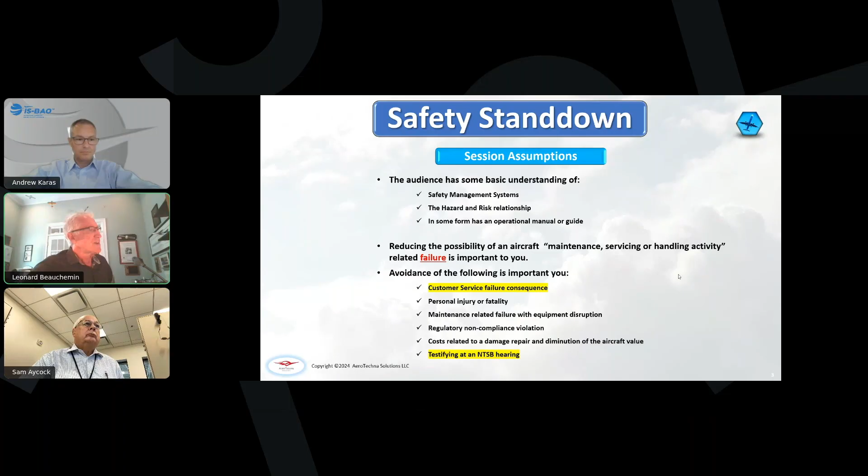So my assumptions are, as I just mentioned, safety management systems - I don't need to walk through that. I do believe that everybody here is interested in reducing the possibility of aircraft maintenance, servicing, or handling activity-related failure. It's not just maintenance - I'm going to show you examples of servicing and ground handling where I experienced an AOG in an unusual location.

And then avoidance of the following is important to you: of course, customer service failure consequences. It's not just that you're going to have a mechanical disruption on the airplane or a bad event from an aircraft operation standpoint. So I'll go through these slides, and I'm not going to read each one - I should have mentioned that already. We'll talk about them at the end. If you have questions, we can do that.

So my session goals: understanding and managing failures, with the thought process being first and the behavior second. As PS3 operators, I believe you're not really spending a lot of time just trying to collect a lot of hazards and risk - it's really not about the thought process. So think about what the consequences of failure could actually be, what could actually go wrong, and then enact the behavior.

We're a little bit different in the beginning if you're stage 1. Well, agreement for the goal of avoiding failure is not analytics of process. It's not reports and measuring and policies. It's continuous human behavior - that's really what we're going to look for, especially as we move forward, because we have some behaviors that creep into our operation, especially as we become very mature with SMS. I've been with SMS since its early days, in the very early 2000s, I think about 2001.

So also, to gain probably some consensus: accept the goal and realistic management of risk to an acceptable level, and that we will have losses. Your aircraft are designed and delivered with the expectation of the probability of loss. Now that probability is very, very low - for a top event, it's 1 times 10 to the minus 9, so 1 in a billion, when they're doing the engineering analysis and development. But yeah, that type of loss is possible.

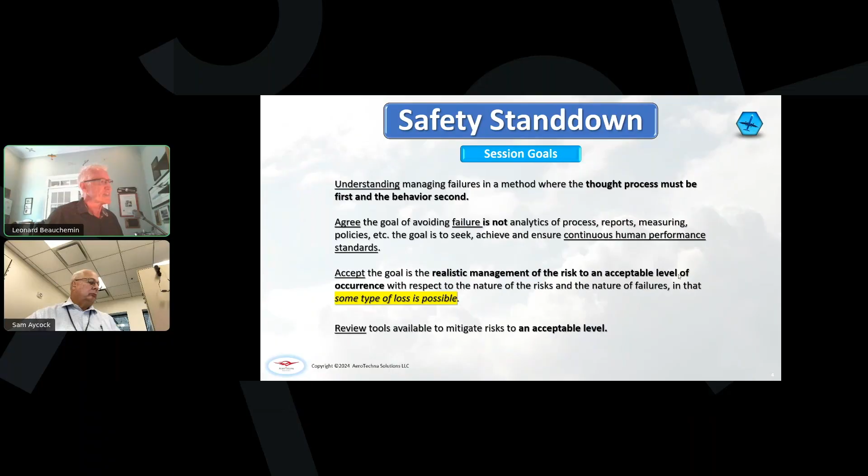It's, we really can't eliminate everything, so we'll work on that. And then hopefully I can give you some tools to consider. One of them will be that post-maintenance SMS - that is a tool to be used that I hope will check off all the possible, we'll say, quality escapes, at least from the disciplinary area of activity that took place on your airplane.

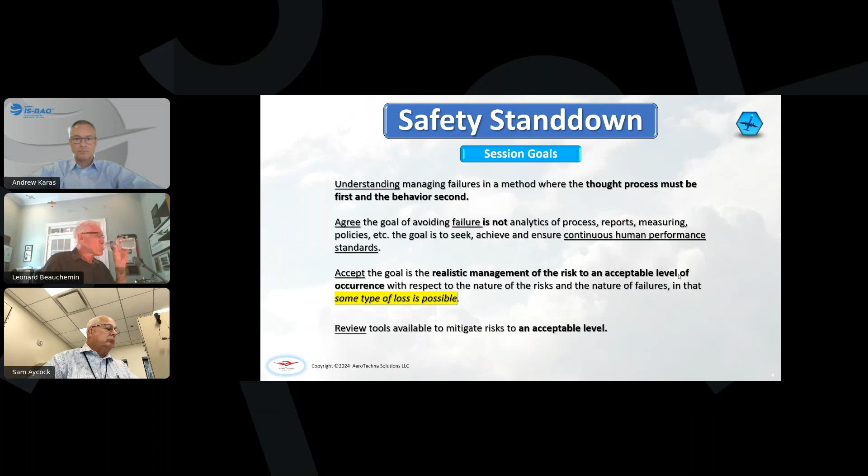Okay, some safety myths. I like to talk about safety myths first because we're in a very different place with PS3. Some of them, really quickly: safety is our business. I don't believe anybody on this call is really where safety is your business. When I say that, it relates to, are you manufacturing, selling, working in environmental health and safety environment? I don't believe that to be a flight operations responsibility. That's a bit of a myth, and we hear those words.

The next one is: safety is ensured by training and equipment. We need to always consider, no, that's not specifically going to be the case either. Some people say, hey, I got you the right gear, I got you the right training, we shouldn't have any events, right? Well, that's not going to happen.

And then one of my favorite ones: I have a contract with the FAA, an agreement with Transport Canada to teach maintenance program development and management. And of course, when you talk to regulators, a lot of them believe it is safety at any cost. We know it's not safety at any cost. If we just look at the air carrier industry, if that were the case, I'd suspect they'd have a big panel or software in the galley area that tells you when your seatbelt is buckled or not, so they wouldn't have to worry about walking up and down the aisle. So we have that in our automobiles, but not in aircraft. But is it worthy? So it's not safety at any cost.

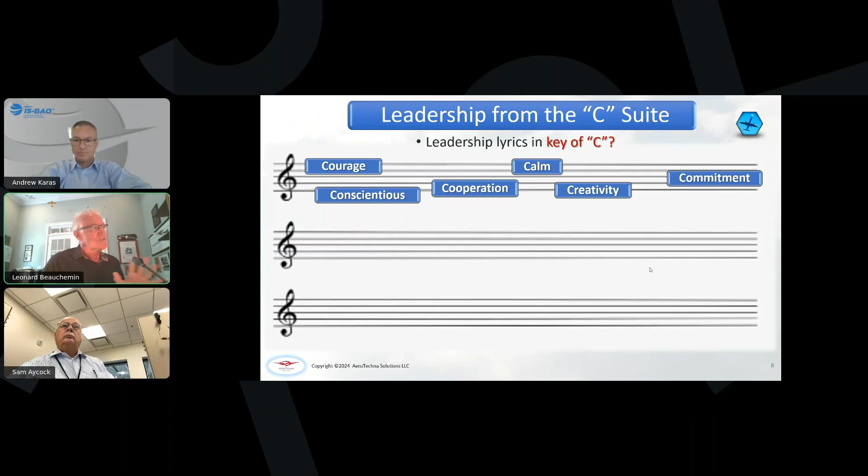And then in the next bar, we got, of course, some additional words, so I'll go through that. Some of these are very important - two are going to be very critical to what I'm going to talk about in just a few more minutes. Clarity, communications, collaboration, confidence - all these are important, right?

Character, compassion - I'm an aviation idiot, my mom always told me that. So yeah, compassion, I'm very compassionate about what we do, and compliance. We stand on that. That is the pillar to take us to what we like to think of ourselves as being a safe operation, right?

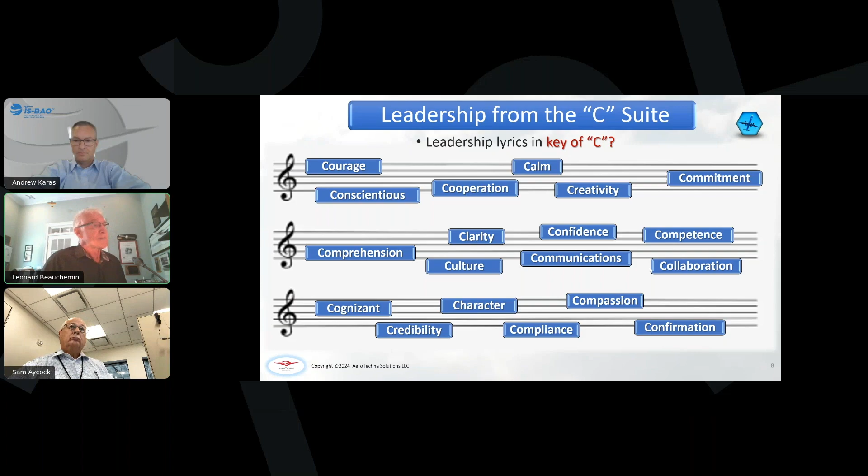That confirmation. But there's some also interesting C words that can really disrupt this. Now, when I do this in a group, I kind of incentivize everybody to throw out some ideas. But here's some words that don't really help us out when we're trying to send the right message and build a culture. So all these C words, these are words that can create some chaos for us, and that's one of the words there that really don't get us what we expect out of it.

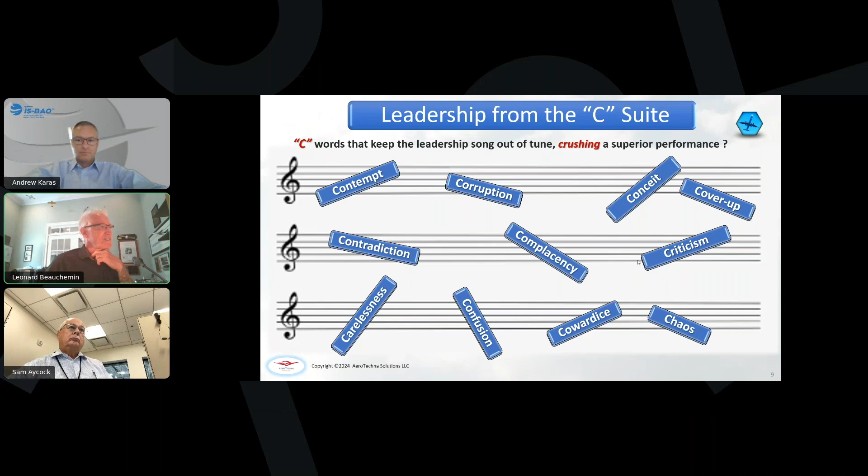So it's a good idea, I think, sometimes to think about the message that we send and the words that we use that don't help us out. So when we go through this process, over time we identify that we have a risk appetite, and that's really what a lot of this comes down to. It's both personal risk and your cultural risk in your organization. A lot of times I can go through a little group exercise to help us through that.

But I'd like you all to take the time to understand you have a personal risk appetite. So I'm a mountain biker, a single track rider, wakeboarder, a skydiver. Okay, pilot, that's not high risk, right? But my behaviors, some people say, well, that's a risk appetite, Len. That maybe is unlike somebody who rides a motorcycle or somebody who refuses to ride a motorcycle because of the amount of risk, or free climbing.

So a couple of things that I like to talk about. One is if we go back as far as Wilbur Wright, a really good quote that I was able to locate: carelessness and overconfidence are usually more dangerous than deliberately accepted risk. That's true. All the activities I take place in and partake in are things I've trained for. I've watched - of course today we can watch videos - and I've practiced to get all the risk out that I can. So I think my personal injury is going to be pretty minimized.

There's another one that I've used in my time with leadership responsibilities. I've been VP, I've trained in a leadership role to help assist others develop leadership skills. This is a good one: just because it's not wrong does not make it right. It's a very interesting conversation when you enter that. And that's a bit about, if you're going to be blunt, it's time to call that out.

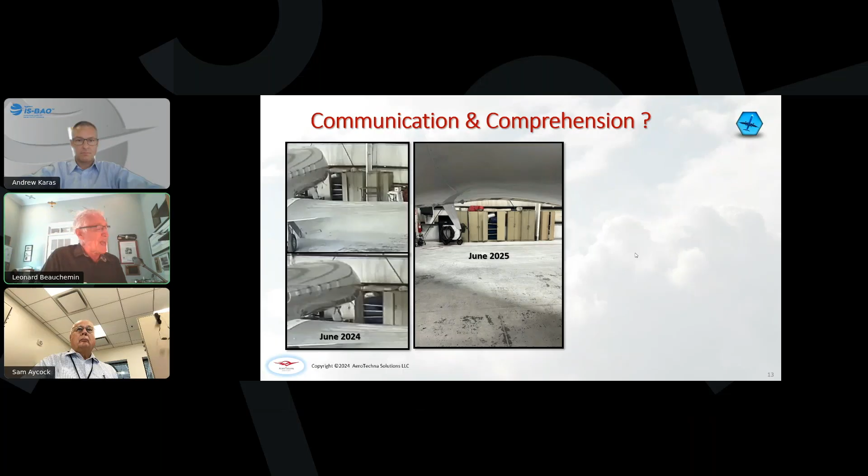What was interesting is that you think you communicate and get comprehension, and this can never happen again. Back in June 2025, my captain was in there and took a picture and said, 'Hey, Len, check this out.' So he sent me that picture. There's a disconnect there from what I would have expected. Maybe the communication and comprehension weren't aligned, but that cabinet door was left open, which is what happened when a breeze came into the hangar and damaged my airplane.

And most recently, I went through a very thorough debrief on my 144-month inspection about the quality of the aircraft, and we really can't have any damage to the aircraft. Please do not deliver me an aircraft with damage. So you're going to see those pictures on the right. I have some scratches on my entry floor, some scratches on my leading edge, and some scratches on my antenna penetration areas.

You might think, well, you found those during maintenance. No, my airplane was returned to service. We were out with the flight crew preparing to depart, doing a walk around, and that's when we found these. I asked, 'Are we all done?' They said, 'Yeah, we're done.' Well, I don't know that you're really done, because I have these quality escapes, and that's what they are. On the leading edge, they can be significant depending on the depth. And on the floor, my principal is a very specific type of individual—he's very precise about cleanliness, neatness, and no damage to his aircraft.

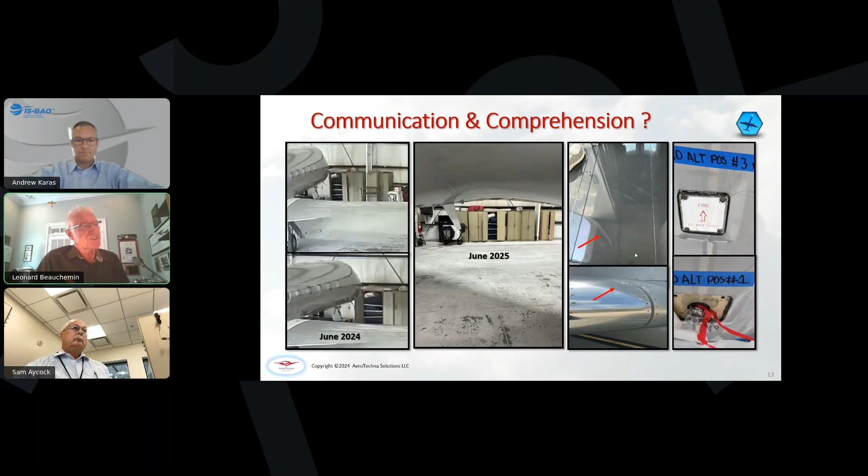So we're sharing information. If your scheduler or dispatcher looks out the window and sees something that's not quite right with the tug operations or another approaching aircraft, we would certainly expect that we can approach that and communicate. At the same time, we should have comprehension of what we're trying to communicate. So say, 'Hey, make sure you address this.' In a very basic way—address what? And of course, you can always say, 'Repeat back to me, do you actually understand?' That's very common on the flight deck. I'm a pilot, so read back is important.

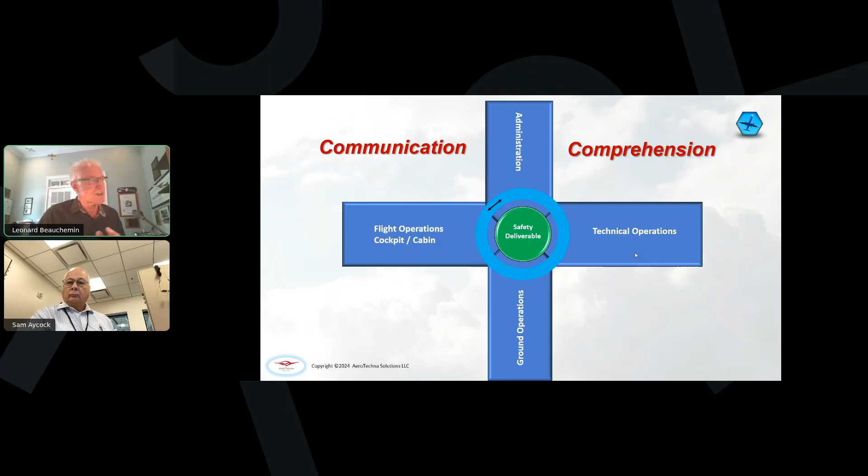But in the center, if you come to agreement that safety is actually a deliverable, it's part of our agreement and commitment to our passengers that we've done all that risk and hazard mitigation. We've taken all the steps necessary. I don't ever talk to passengers in terms of hazard and risk—I always talk in terms of safety. But internally, I think most of you talk in terms of hazard and risk, and that's really what we're after.

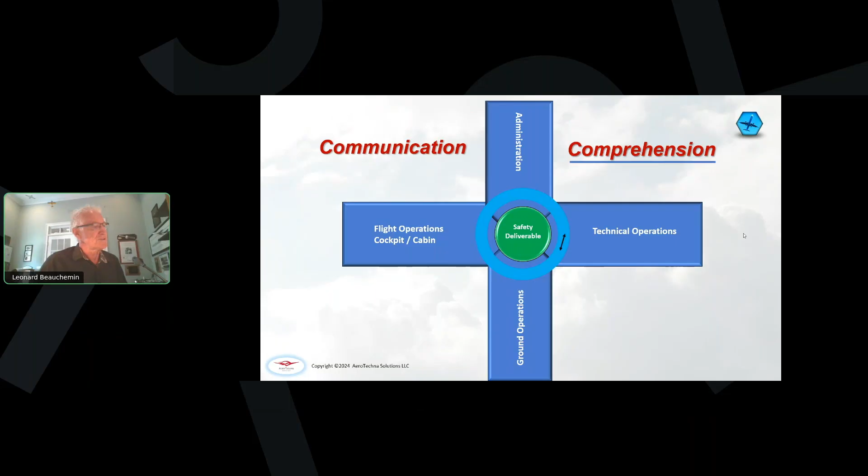So kind of a visual—adult learning is very visual. I like to give this approach where comprehension, to me, is becoming an issue. Maybe it's the four generations and the ability to Google and text, but you have to validate that. So when we look at safety as a deliverable, there are seven attributes we're all working on. I'll populate this chart and give you an idea.

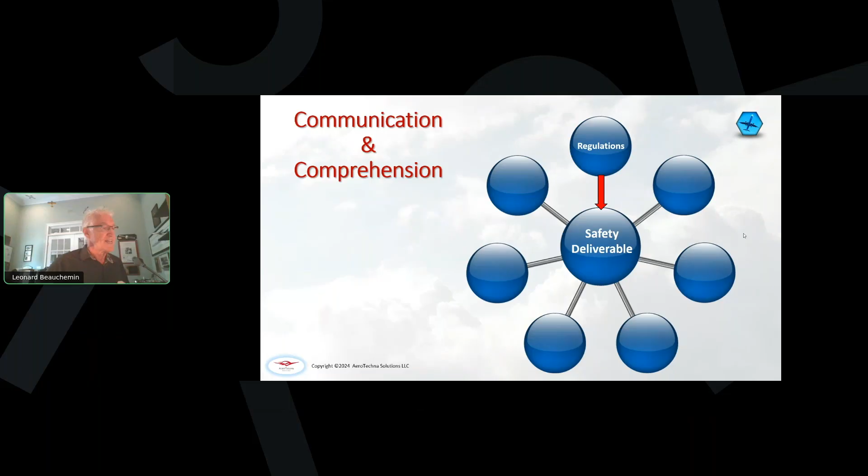Our very first box is regulatory, right? We have to comply with the regulations—that's pretty black and white. All those regulations are really driven to ensure a level of risk that is acceptable at the regulatory level. It doesn't mean ours couldn't be tighter, but at the regulatory level, that means they're accepting a level of risk for the industry at large.

We have regulations, and then we take those regulations and embed them into an operations document. That operations document has a couple of purposes, but one of those is to ensure that hazard and risk have been mitigated to a precise level. So safety is a deliverable there. We have a just culture policy—I'm suspecting all of you on the call today are familiar with just culture.

The essence is that when you have a performance issue, a quality issue, not intentional negligence but an error made, the consequence should be that there's no punitive effect from voicing that. It's an open door. I have the ability to say, hey, I made a mistake, and not get a punitive response from that. So that's just culture, real brief.

Training, training's all about our safety deliverable. We have to have the proper training. We get that. Equipment, I've mentioned that already. And yes, we certainly have reporting, assessment, recording.

There's no way to know how we're doing and to measure ourselves, to say if we have a tendency to have one particular activity that's creating more issues. We wouldn't know that unless we went through some reporting assessment. And then we like to use industry standards, and that's what IS-BAO is.

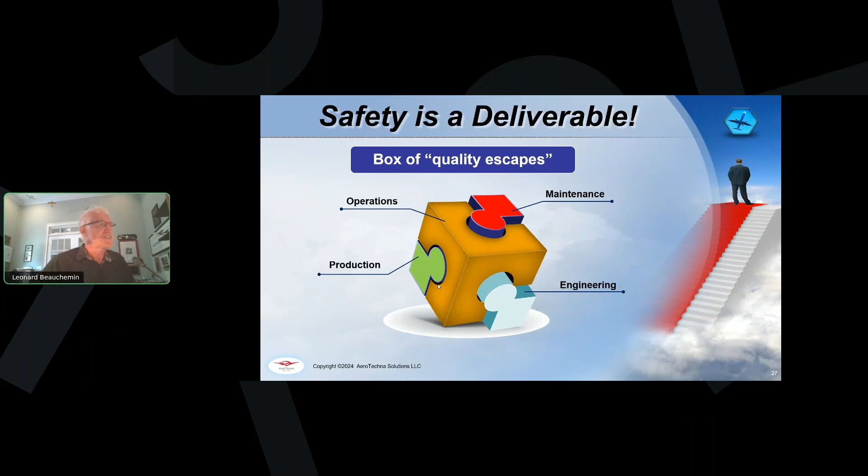Of course, they come from maintenance. I just already showed you a few of those, and engineering.

So here we are. An assembly of defects, errors, and mistakes ready for flight, right? We hope not. Airworthy and ready for the mission, mission ready. Those are two different concepts. Mission ready means my passenger services, the connectivity, whatever catering, whatever equipment he wants on board. Yeah, it's mission ready.

So when it comes to identifying the fact you have a quality escape, what can you prevent, why you can prevent it, and how? How do we do this? And I want you to strive to elevate your perspectives, expectations, and choices related to aircraft technical preparedness. See what that means.

It's a bit incredible. I went to Chattahoochee Technical School here in Atlanta. One of the conversations was developing a program for tool identification. So that means the technicians entering the industry don't know the difference between a cross point, flathead, universal socket, straight, ratchet, inexperience, right?

Diminished computer skills, they really rely on their ability to find things through Google. And of course, now we're using AI. So pick one of those fun AI software, Copilot or whatever. And of course, alternative communication skills.

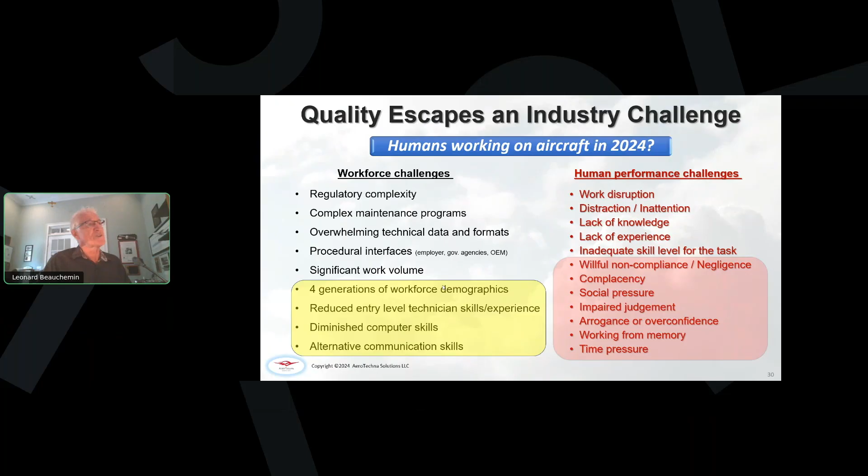One is willful noncompliance. This is when somebody elects not to follow the checklist provided in the AFM. Somebody chooses not to follow the maintenance instruction provided in the AMM. And I think AFM is for the flight manual, the aircraft maintenance manual.

Complacency, social pressure means it's a bit of a tribal rule. We're all doing this, we all move the aircraft, gross example, and we're only using 1 or 2 people and we never have an event. So why would I ever ask for 3? If I ask for 3, I'll be judged on, there must be something wrong with me. Everybody can move it with 2.

Impaired judgment, that's an issue. Arrogance, overconfidence, working from memory and time pressure.

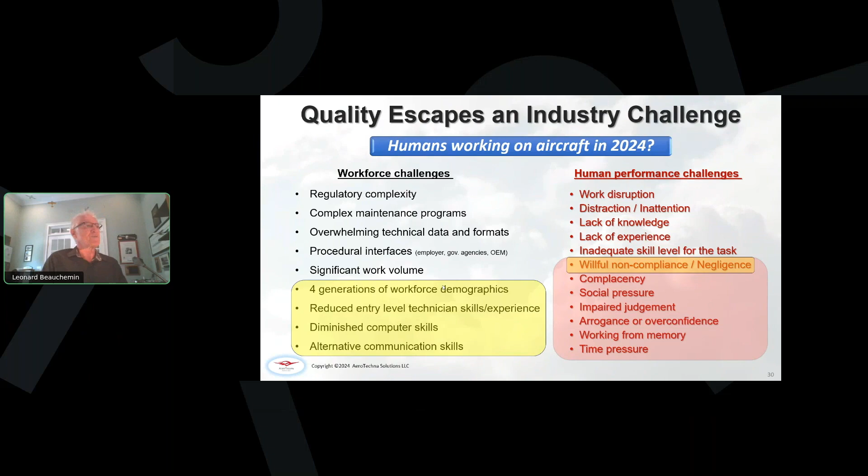So, some quick ones on that. A few other quick quotes. I like this one: what we hope ever to do with ease, we must first learn to do with diligence. And this is, I think, my most favorite quote I've ever read: we make our world significant by the courage of our questions and the depth of our answers.

This presentation, if you have good questions, don't be afraid to ask. And my point in the beginning is don't be afraid to be blunt and ask a question, whether it's of your coworker or a supplier.

All right, so quality escapes come in three buckets. I like to put them in. They come from manufacturing, I put those in the bucket called defects. They come from deviations, these are errors. That means I didn't follow the particular instruction.

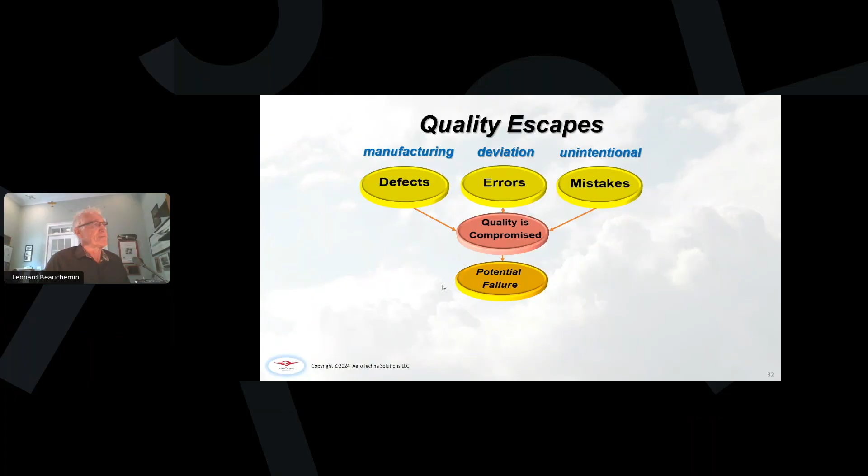I didn't do something correctly, whether I chose to willfully do it or not. These are errors that we make, and they're deviations, usually from a procedure. And then mistakes, unintentional - maybe the wrong screw was selected, maybe the wrong screw was put in the parts bin and you got the wrong one and it didn't work out. There are things that are just simply mistakes. We all make mistakes, we all commit errors, and we have aircraft with defects. But in either case, quality is compromised. It's a quality escape, and we have the potential for failure. This is our circle of opportunity.

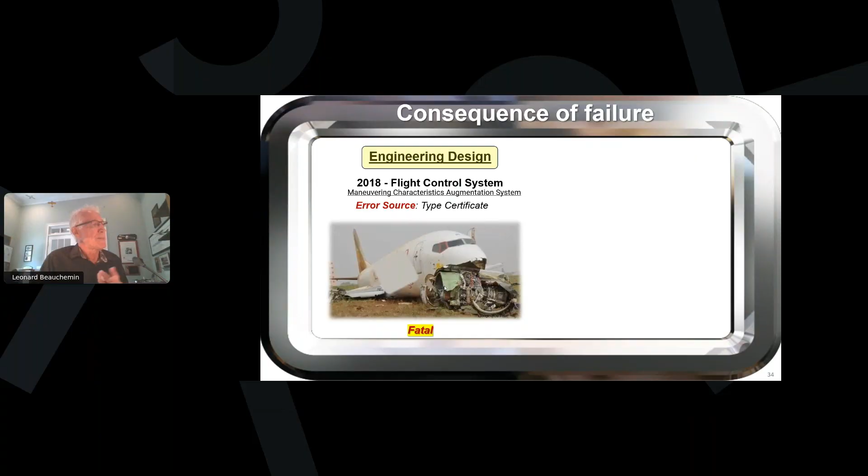Okay, so let's look at some situations real quick. Here's one I like to reflect upon - you might all recall this. This has to do with MCAS, Maneuvering Characteristics Augmentation System. That was engineered - there's a lot of questions and a lot of opinions. It really comes from the type certificate and type design of the aircraft. The finger pointing said that was an engineering deficiency, though that would be a quality escape, right? From engineering, little we could ever do with that. We buy the aircraft, we operate it in accordance with the AFM and the AMM and all the other document sets, and we expect a good outcome.

I think we're all familiar with this one. This is a production quality escape. There's not anything we can do from an operator perspective, so there's no control that we have on either of these, right? Fortunately it was non-fatal. We're familiar - it was a break in the production sequence that resulted in some missing fasteners that allowed the door to depart the aircraft. This stuff's all in the media.

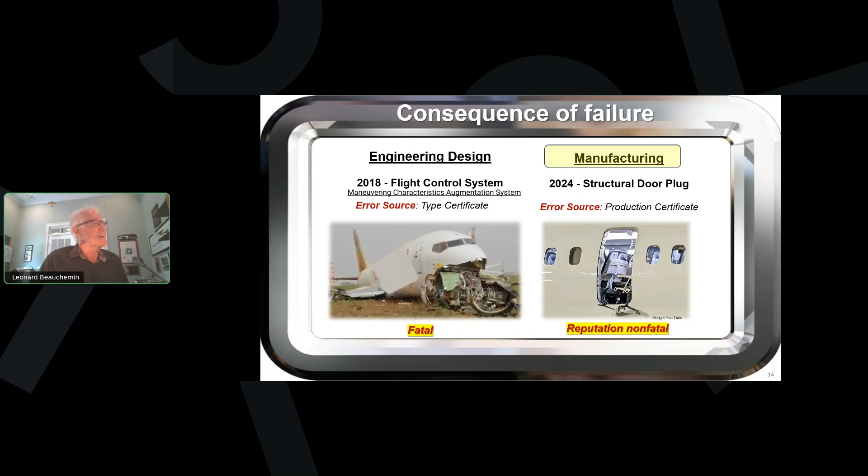Some of you may not recall this one. This has to do with fasteners missing. This is an Embraer aircraft. For those that have been around a while, this is a maintenance activity, so it comes from ensuring the aircraft maintenance is compliant, thus the airworthiness certificate. There are three certificates - I don't do a deep dive on that, but we have a type certificate, a production certificate, and an airworthiness certificate, of which the only one we can control in our operating world is the airworthiness certificate. We don't have any authority to manipulate, change, or mismanage those certificates. But in any case, what happened here says there's no evidence from the morning pre-flight that the flight crew was aware of any of the work performed on the horizontal stabilizer, right? And that's going to be part of my review of this post-maintenance SMS debrief.

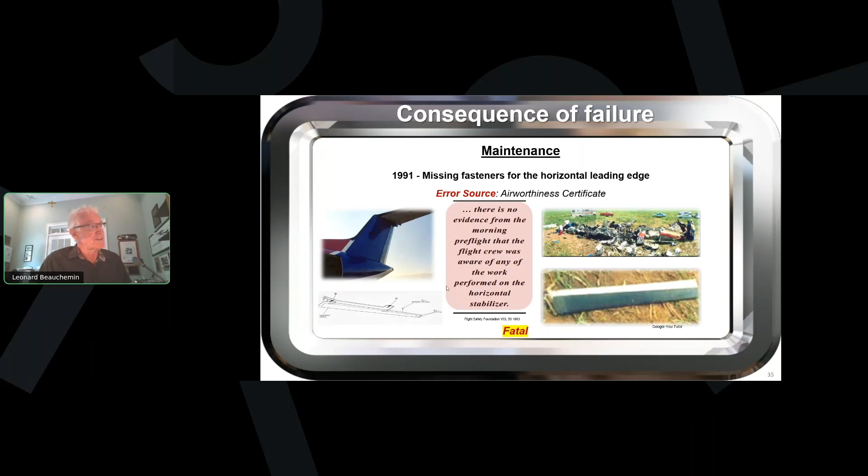This is the most fatal.

Am I okay? That was a little weird. You can still hear me, Andrew? Yep, you're still good, Len. Yeah, I don't know what that was.

All right, so I believe even now this has the highest loss of souls in our industry. If anybody remembers JAL Flight 123, 520 souls basically. But what's very curious about this quality escape is that it took place in 1978 after a tail strike on the aircraft and then a subsequent repair. The repair wasn't done correctly, and in 1985 it was complete and total loss of the aircraft. Very, very significant, horrific. There's a monument built, if you go visit, if you're in Japan - a very sad kind of memento place.

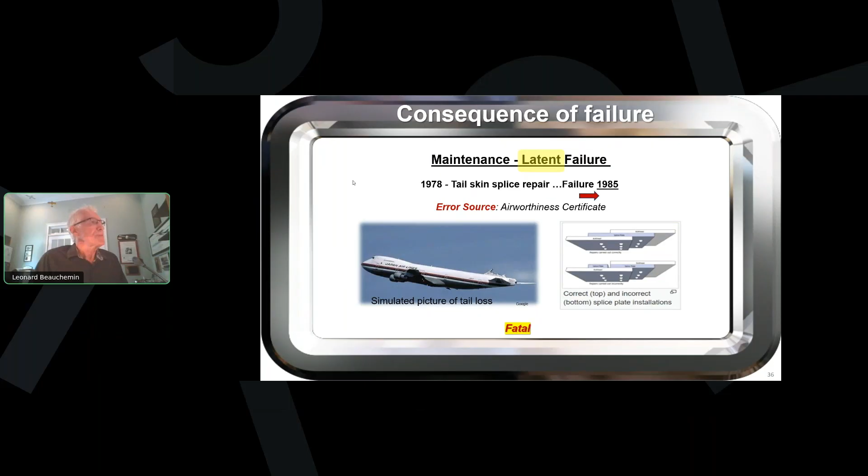And then I think most of us in aviation are familiar with this. This is failure transfer - you can do a lot of research and background, but the essence is there was a repair strap put on a DC-10. It wasn't compliant, they actually could not find all the records. Definitely a quality escape, not the right material. It departed the aircraft onto the runway. The Concorde had the subsequent takeoff, hit the tire, the tire ran over the titanium strap, failed the tire, failed the fuel cell, fire, failed the aircraft. There's also some records about a missing spacer shim in the landing gear, however most believe that wasn't the cause of the accident - it's really the rupture of the tire and then the fuel and the fire.

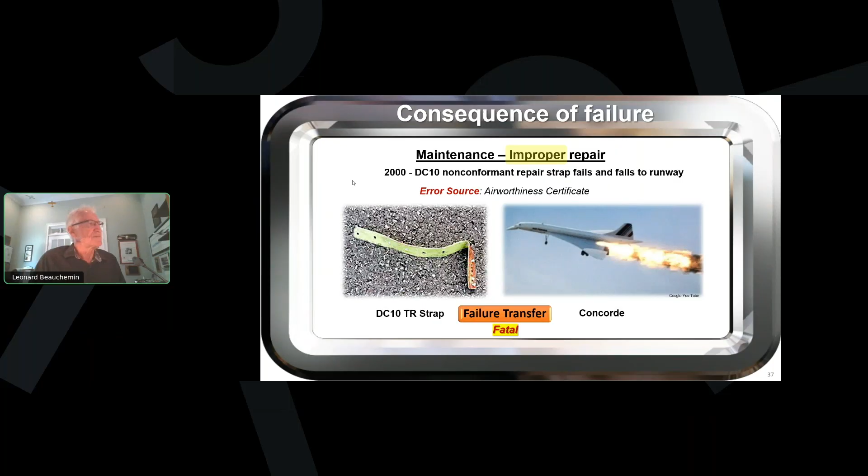So you think, oh, those are significant - this one is one that we can manage at our level, the other one's very difficult. Some might be familiar with this one - it talks about a new aircraft delivery. It's a brand new Cessna 510 being delivered. It's going to be a foreign registered aircraft, so the registration numbers are painted on the lower part of the wing.

While the aircraft was operating in the U.S., the registration transfer hadn't taken place, so the registration numbers hadn't changed. Someone said we need to cover up the registration numbers, which is exactly what the paint representatives did. They went out and covered the registration numbers on the bottom of the wing. However, they also covered the fuel cell vent opening.

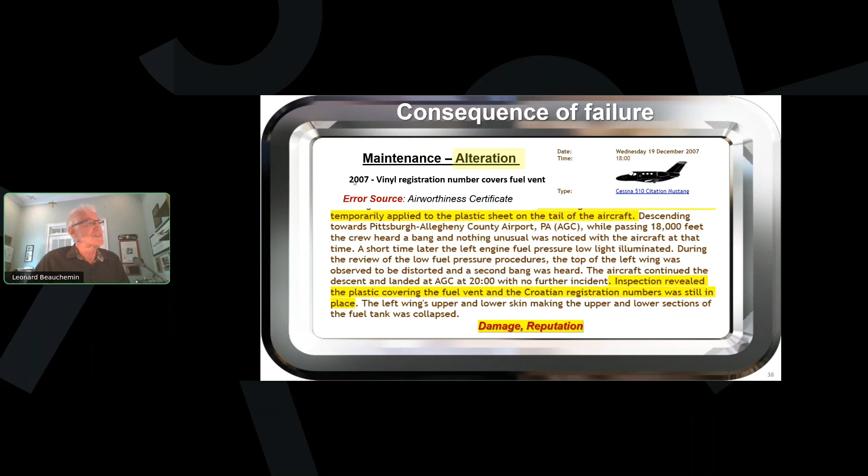So these quality escapes come in many ways. Some people would look at this incident, which was in the media a few years back, and say, oh, that's a maintenance misadventure. It's not a maintenance misadventure. That was manufacturing. The panel wasn't properly installed coming from the production certificate. Fortunately, that wasn't catastrophic. So let's bring it down to the real world, which is our world today.

Some of these we hope never to experience, but these are actual experiences I've had within the last 5 years. This is my G550 wing, and you'll notice the spoiler board has lifted up and is lifting off the wing access panel for inspection on the trailing edge of the wing. We've been flying this airplane for many years. We depart maintenance, it takes a few trips, and my crew on the walk around identifies that the panel is damaged and becoming cracked in that location.

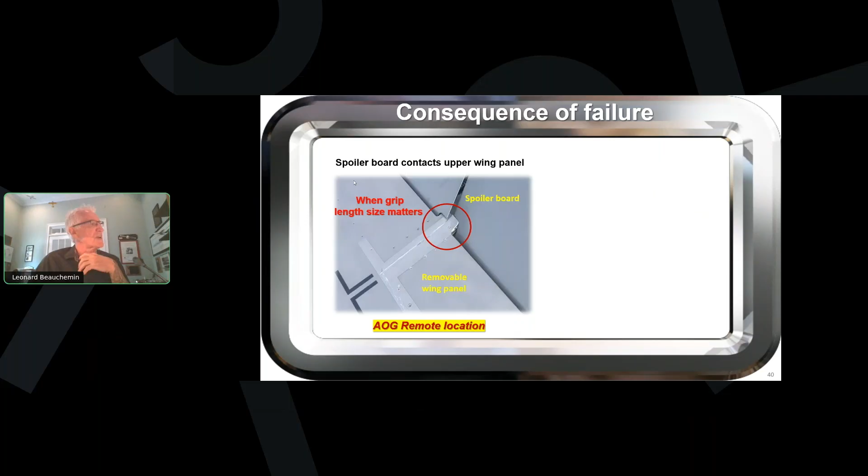So of course we're AOG, we have to deal with the situation, and I get the note: grip size matters. The MRO did not use the proper grip length in that removable wing access panel. What should have been a shorter -4 length, they installed the -5, a longer length, which didn't allow for proper tension on the upper panel and let it drift up with air pressure until the spoiler board caught it and started lifting it up. The cost of repair was significant, but what was really difficult was the location we were in when my flight crew identified it.

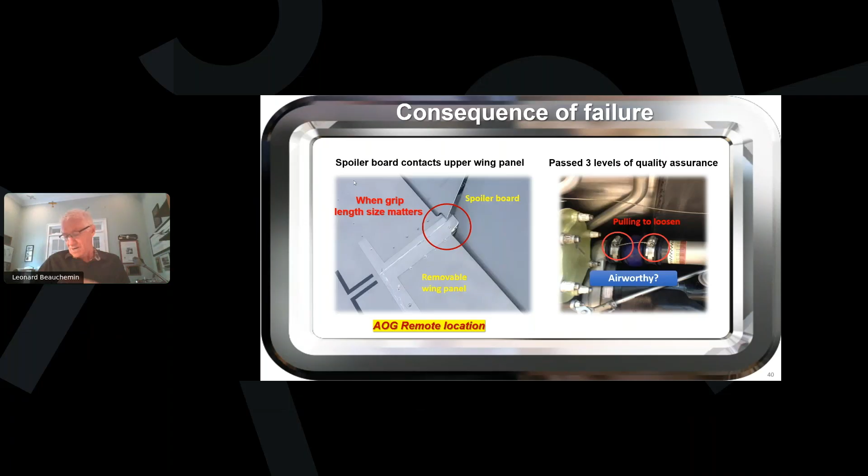Here's one I found on a walk around during an aircraft delivery. The aircraft engines had been recently overhauled - a major shop visit - probably with at least 3 levels of quality assurance. But on my walk around, I identified one of the band clamps as being improperly safetied. That makes it unairworthy. Could it fly like that for 10,000, 20,000, 30,000 hours? I have no idea, but it's unairworthy. The risk is unacceptable - if the clamp becomes loose and the air pressure going through that duct causes the coupling to depart, that could be a really bad day.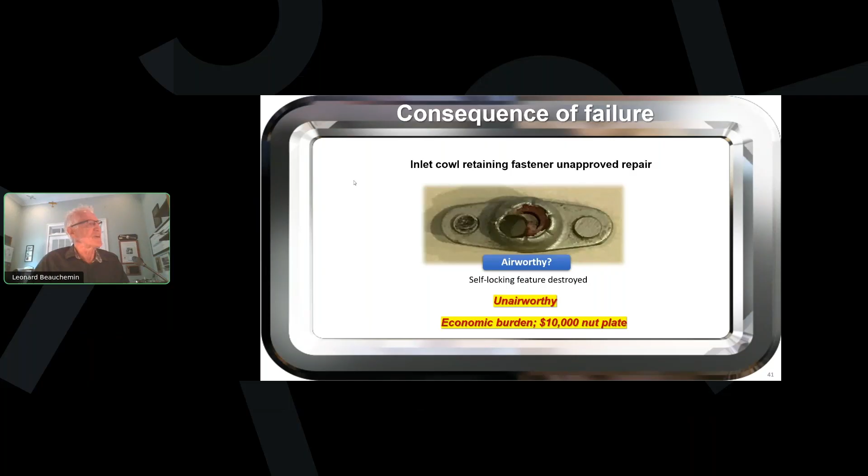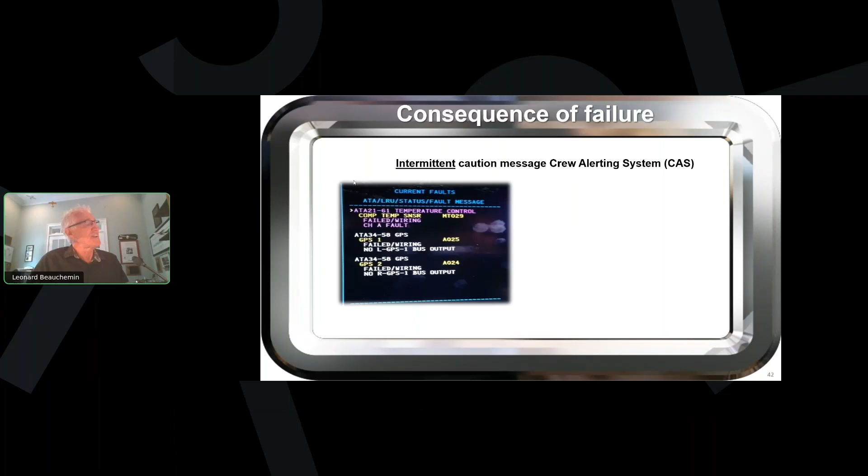This happened on a 7X that I operated for quite a few years. I had a compressor temp sensor giving an amber cautionary message. My crew would get that message, and we did a tremendous amount of troubleshooting - wringing wires out, swapping parts, putting new parts in. None of that solved the problem. We took the aircraft back to the manufacturer and said we can't acceptably fly this aircraft any longer since it's intermittent. They did the inspection, and here we have the cause of the failure - interestingly, it's called a high intensity radiated field failure. It wasn't a physical connection issue on the wires, but the shielding had broken down enough that, with the right combination of power transitions through the wire harness, it caused the CAS message to display.

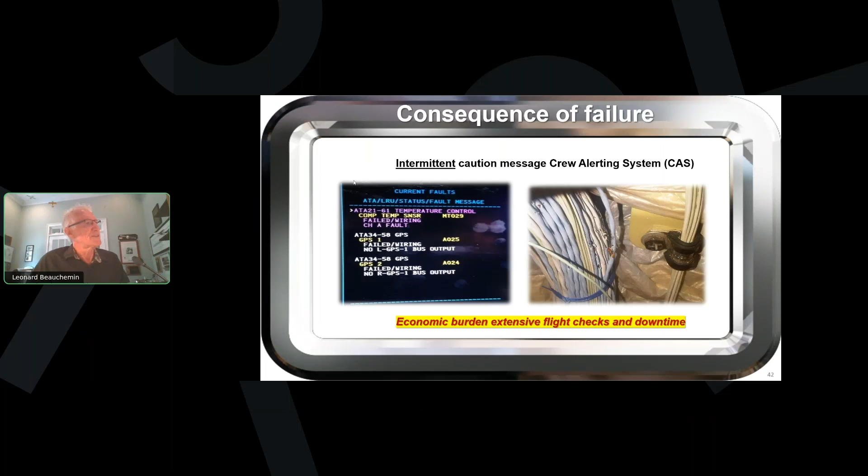Okay, then we have, of course, over in the left hand, I got a dent in this combustor housing area. So no, that's not acceptable. It's not airworthy.

And my other AOG remote situation, which created a lot of havoc, is this ground handling damage, where the squat switch and the nose gear was damaged by ground handling and towing of the aircraft. My flight crew, it's generally visible. It's not really hard for those that are familiar with the G5 type airplane, but that damage in the housing created intermittency in my nose wheel steering on the aircraft, and eventually, of course, it failed in AOG.

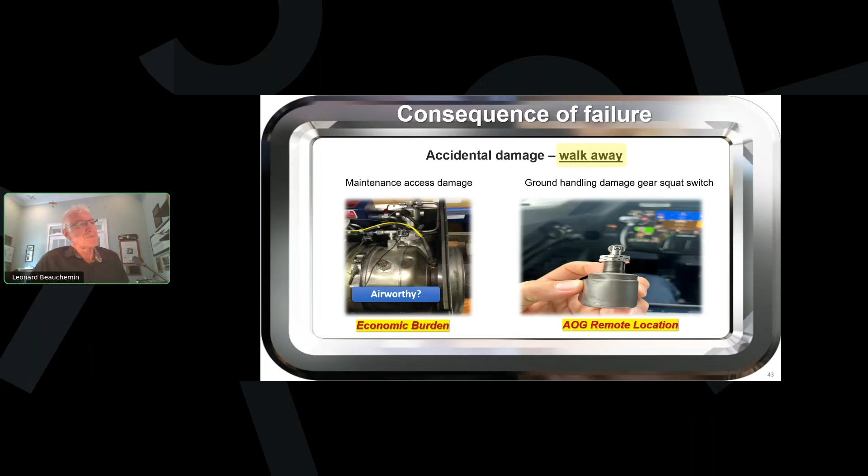Quality escapes - every one of these is a quality escape. Fortunately, I haven't had to deal with anything catastrophic. You walk away. So quality escapes have many entry points.

I tried to make that point - the consequences of failure are random. That's not the goal here. To me, no quality escape is acceptable. I'm not going to make an assessment that, well, that's okay. We just don't do that in aviation.

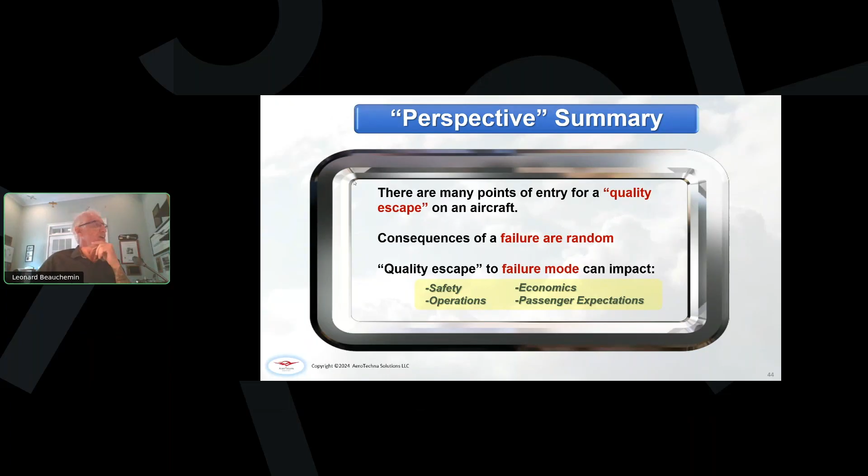So those failure modes impact safety, economics, operations, and passengers. We get all of that. So I hope I didn't scare you too bad, but I want to talk about some of the mitigation that we do in industry from an engineering standpoint, production, and that we try to achieve in maintenance and daily operations.

So you should have confidence in aircraft failure - you should, management, the industry. When they are at an engineering standpoint, we work to what's called functional hazard analysis. We have failure modes effects analysis. We analyze, and the industry analyzes, every failure possible to help mitigate that. I'm an industry steering committee chairperson for maintenance program development. That's what I teach the FAA, Transport Canada, Delta, FedEx, Southwest, pick somebody. I think we've trained over a few thousand people.

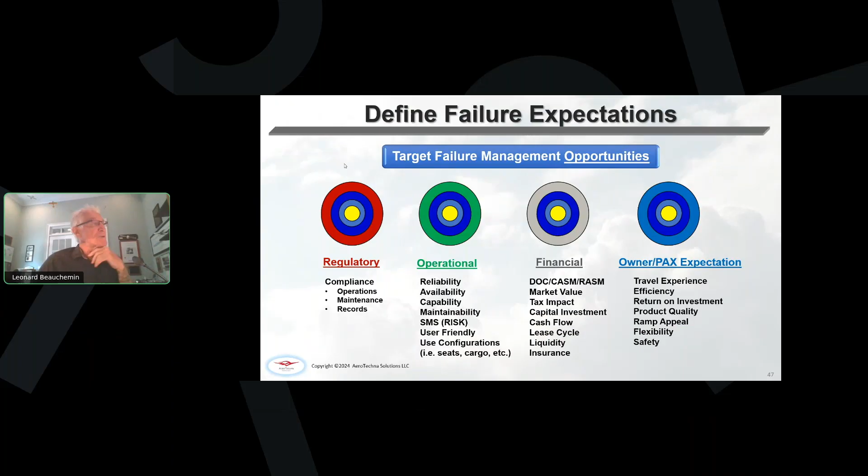But let's see what happens to us. These four targets represent our management opportunities for elimination of quality escapes. Won't read through all of them, but I'm going to focus on regulatory and operational.

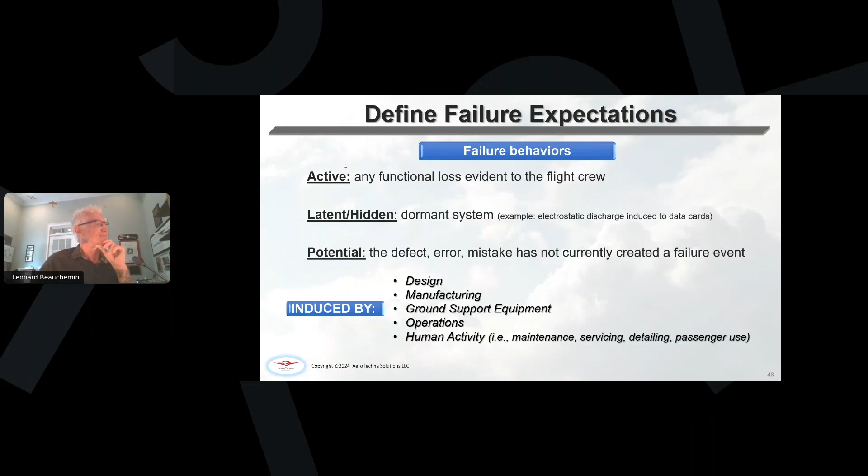Okay, failures come in three flavors: active, latent, hidden, and potential. They're induced by - I mentioned this already, you can see those three there - design, manufacturing. The ones that we have impact are, we're going to say, operations and human activity. We'll populate this.

So there are quality management processes in place to identify these quality escapes and hopefully eliminate the opportunity for failure. From the type certificate standpoint - engineering, manufacturing - this is all type certificate. There are audits, and there are manufacturing inspection district offices, aircraft evaluation divisions. They conduct audits with their service bulletins, airworthiness directives, all this to constantly improve the product. This is what's made our industry so safe.

If I come over on this side and I look from the operational standpoint, that's us - we take the aircraft out and we're operating it. I can bring my aircraft to the original aircraft manufacturer, type certificate holder. Yeah, they have audits, they have rigidity, they have requirements. Out of those audits can come, once again, airworthiness directives and procedural changes in the instructions for continued airworthiness, the flight operations manual - pick a manual.

If I use a certified MRO repair station, once again, they have audits that's required. Those also can produce airworthiness directives and procedural change. If I'm a certified operator, meaning commercial operator, 121, 135, U.S. commercial, EASA commercial type operator, they can result once again in the same procedural changes.

What's very interesting, I find now, and why I highlighted this - as a certified individual, if I work on an aircraft, or you hire any technician to work on the aircraft, there's no audit procedure in the industry for that. So we like to look at what we do here at IBAC and IS-BAO to institute some procedural requirements. But always be aware, if you contract an independent technician, or if you're using a smaller environment that doesn't have a repair station that has recurring auditing, then you're exposed to the possibility that they could induce a quality escape, and that will stay within the organization forever as a tribal rule, maybe, because there's no auditing requirement. That's what I'm trying to say with that.

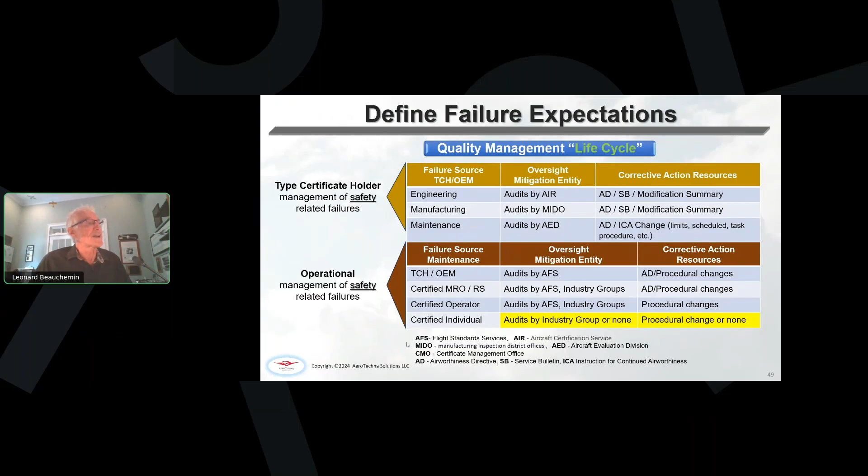Infant mortality is highly probable if you replace those air data or any complex component—hydromechanical, hydroelectrical, electrical.

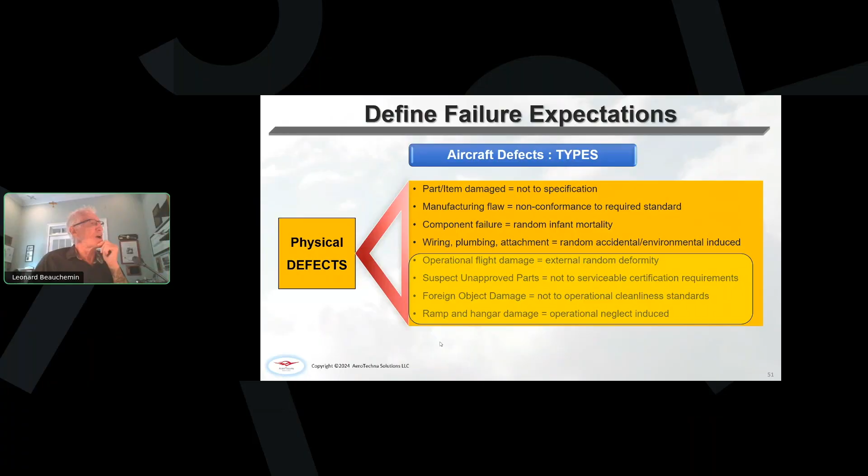Aircraft defect types—I've talked about some of these already. The ones we have control over, that we'd expect to manage at our operating level: operational flight damage, meaning the flight crew on walk-arounds before and after identifying external damage through a very detailed inspection each time. We also manage suspect unapproved parts by validating certification—that's our methodology, proper certifications—so we take confidence that the work in front of us is correct.

Foreign object damage is very similar to operational flight damage. If there's debris on the runway—I recently had this, about 8 months ago—my guess is it was a flashlight in the inlet, and it wasn't noticed by the flight crew. The damage wasn't noticed by vibration indication on the flight deck, and there was no performance indication. The maintenance technician caught the fact that there was a damaged blade, a pretty decent sized dent. So the engine didn't show it, which surprised me.

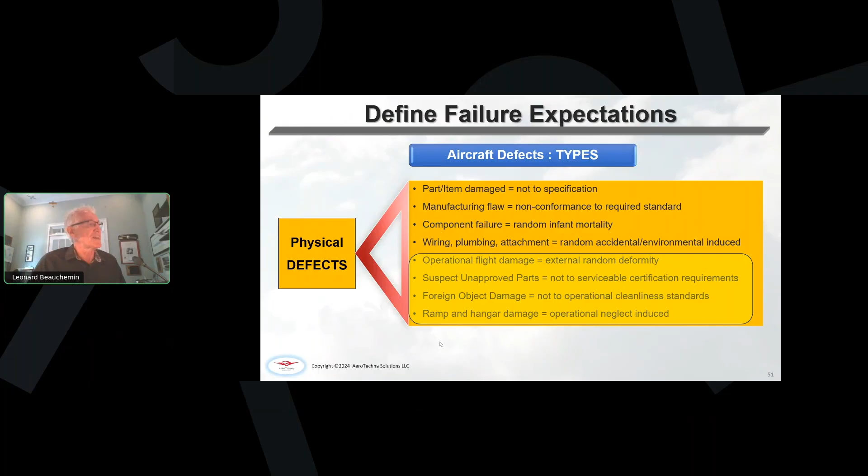And of course, ramp and hangar damage, operational neglect induced. I just showed you one that has to do with my squat switch, where somebody hit it with a tow bar, basically—that's my assumption, I wasn't there. So, errors and mistakes.

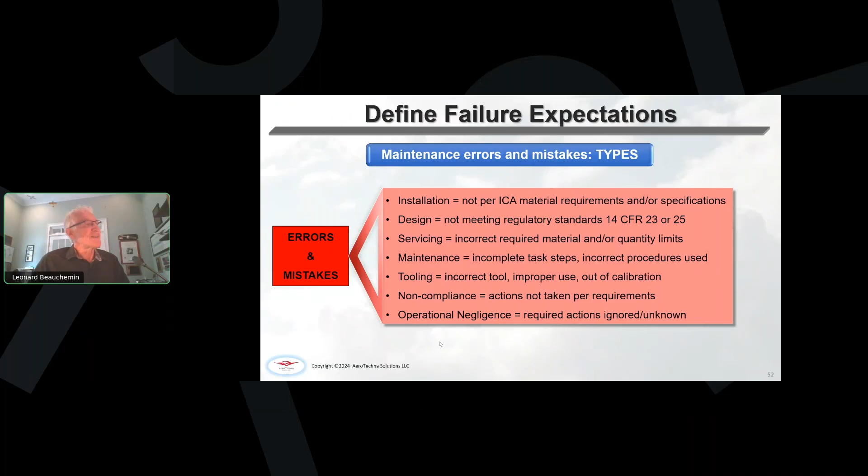These are some of the things we see: improper installation, as discussed with design, servicing issues—you can use the wrong materials, we know that happens—incomplete maintenance, tooling non-compliance, and operational negligence. You either knew it or you didn't, or you chose not to do it. Maybe you didn't take the time to read the proper aircraft flight manual supplement, so it became a negligent situation when the system failed.

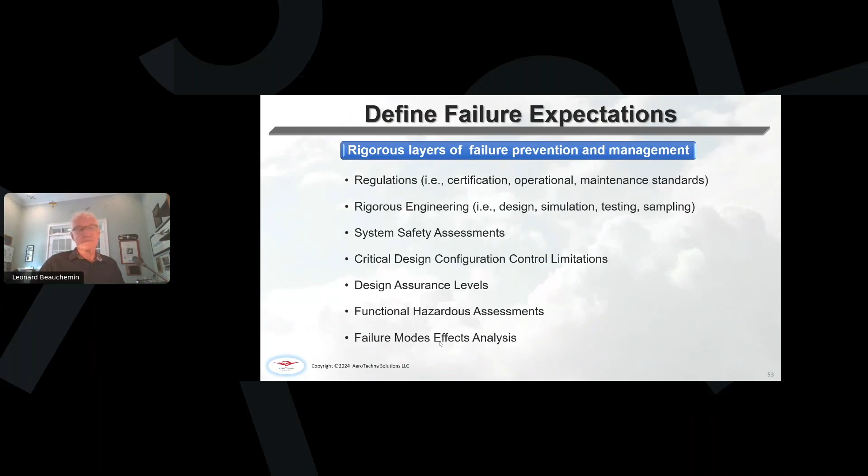There are rigorous layers of prevention. My goal isn't to walk through all of these, but to show you that engineering design analysis is rigorous. There are standard operating procedures—all this comes from the manufacturer, and it's all very rigorous. So our expectation of failure of an aircraft out of engineering, design, and production is very low—a very low expectation of a quality escape, as it should be.

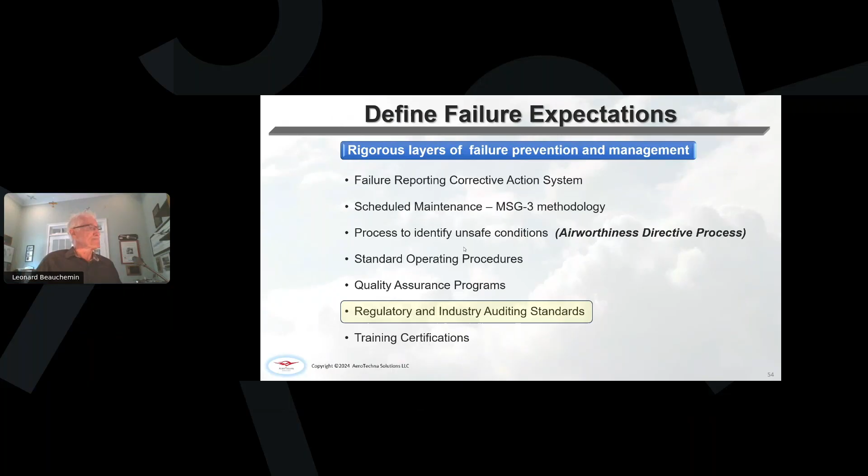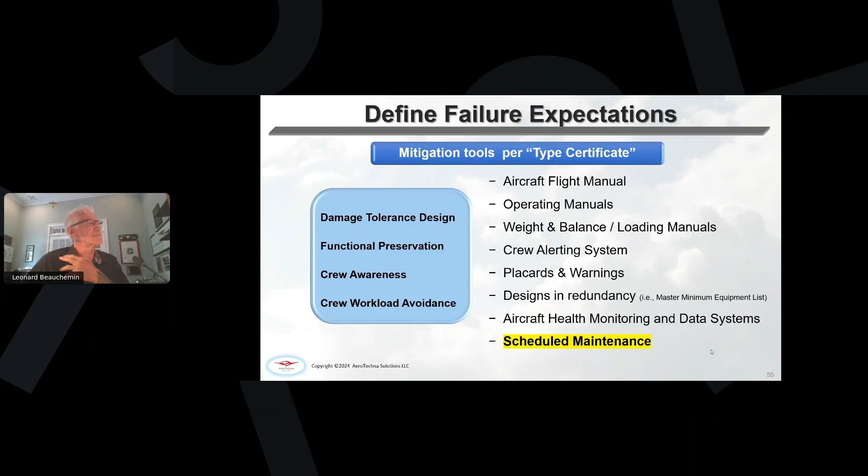Another area is scheduled maintenance—all provided to us by the type certificate holder. This slide talks about MSG-3 aircraft. I'm an enormous proponent of MSG-3; it's the most risk-mitigated scheduled maintenance program you could ever imagine. I know the workload, I participate in the workload—I've been doing MSG-3 since about 1994. We're the group that removed the requirement for hydrostatic testing of pressure cylinders, to reduce maintenance intrusion and the opportunity for failure, because the task wasn't applicable, effective, or relevant to an aircraft part. A cylinder in an aircraft is an aircraft part—it's not controlled by the Department of Transportation in the U.S.

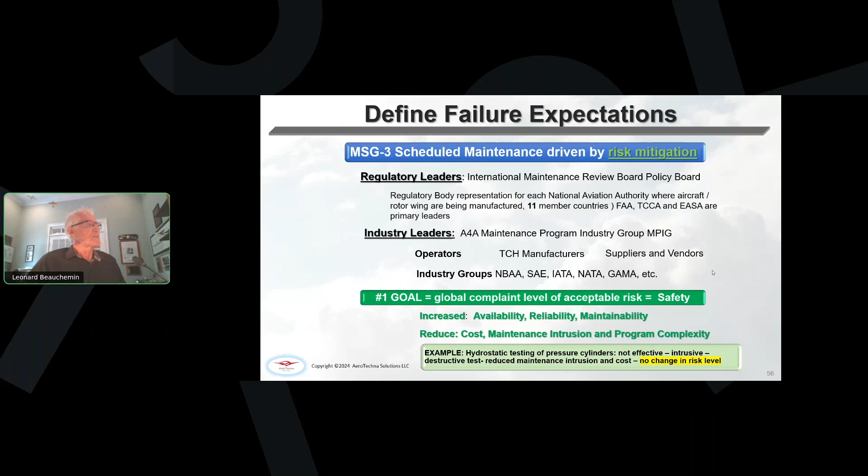So, quality escape—sorry, failure management. I think I've covered most of this. I'll make this point one more time: maintenance ICA activities do not institute failure management methodologies. We have not figured out how to do that.

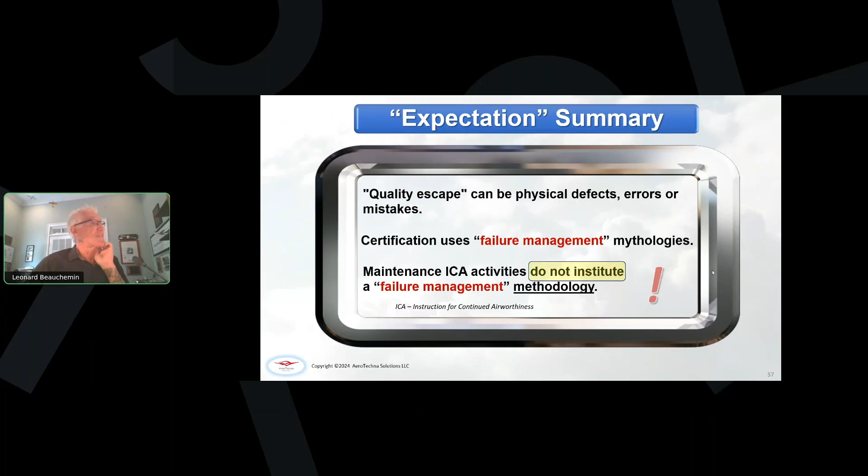Choices and risks. So what do you get to choose? Am I doing on time?

Yeah, we're good. So now we're into the choices. We talked about your perceptions. I've talked about some expectations. I want to talk about some choices we get to make, hopefully to mitigate some of this stuff.

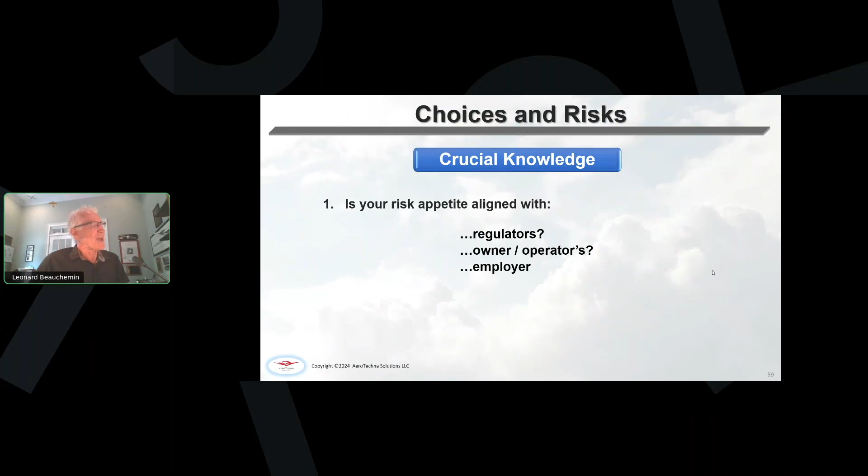First is to understand that your risk appetite is aligned. I'm believing we've reached that point. I've done an audit where that very significant flight operation, and the flight operations risk appetite was quite different than the CEO's, after our conversation.

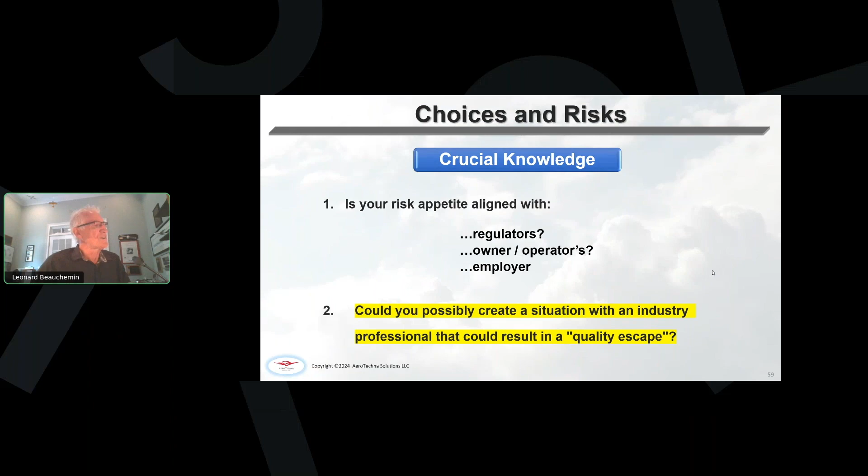Can you create a situation with an industry professional that could result in a quality escape? I typically ask that question, and I typically get hands raised. You can do that. Time pressure is usually the creator. Putting too much pressure on the workforce can certainly result in a quality escape.

Things that you should consider and decide whether you accept these or not. Do you enable a quality escape by accepting these workforce standards? Lack of knowledge, training, and skills. Complacency attitudes, you accept that. Chaotic environments. Choose your MRO wisely. I have a slide on that.

They're very chaotic right now. They're understaffed and overpopulated with aircraft.

Willful noncompliance. I would suspect we never accept that, meaning that they have all the proper documentation when they're doing the work, or proper documentation to operate the aircraft or the system.

Applying or transferred behavioral stress, I just mentioned that. Applying excessive time pressure and lack of a just culture. Accepting any of those is something I think we all focus on not doing, and things we talk about with our colleagues and friends. You don't want to be that negative influence.

All right, the most common maintenance errors, real quick here: not following the maintenance instructions. I have a very interesting question when I talk to maintenance people about whether they've ever followed every instruction. Not often do I get a hand raised for that one.

Non-compliance with the design, that means altering something, putting the wrong part, or putting something in that isn't part of the type design. I call it creative maintenance. Create process, poor quality, improper tool.

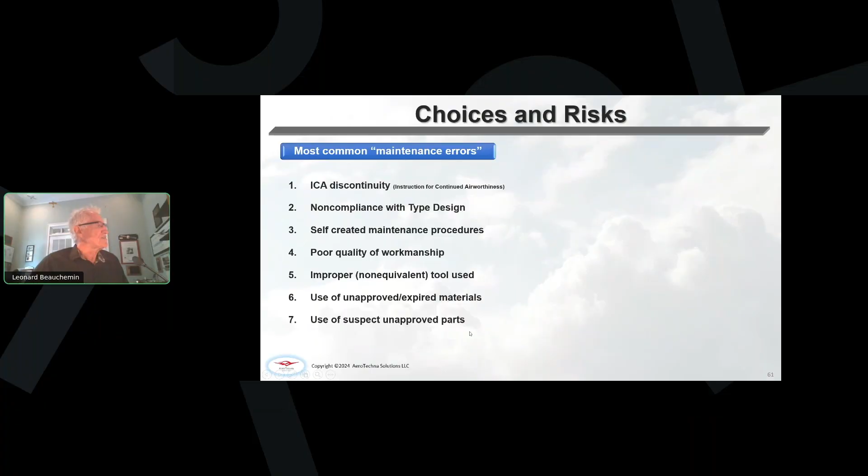Use of unapproved expired materials and use of suspect unapproved parts. Those are common. Most common quality escapes, I think, as flight crew members, when you talk to your staff, cockpit flight configuration is probably number one on my list.

Maintenance people know nothing about the cockpit of the aircraft for the most part. They move switches and move parts and move levers and pull circuit breakers. They do all those things. Same thing depends on some of your caterers, cleaners you let in the airplane.

The elements of a system are not properly connected. We have an event of that with an accident. I do a fair amount of expert witness work, and this is one I'm actually working on. Things weren't properly connected and weren't properly checked, and it resulted in total loss of the aircraft.

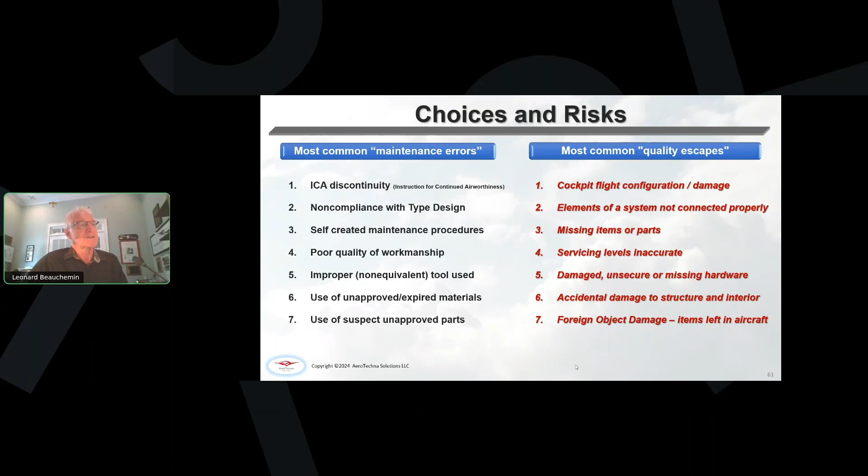Missing parts, servicing levels are inaccurate, damage, unsecured or missing hardware. I gave you an example of that. Accidental damage to the structure or interior. My scratches is a basic example of that, and of course, foreign object damage.

So what are controllable and procedural areas? Things that you can control. This is the post-maintenance SMS debrief, which I'm going to walk through in just a few minutes.

Review of your return to service documents. There should be a process for that to ensure that all the documentation meets the regulatory compliance requirements. Someone should do that.

There should be a standard maintenance release environment. So when you're looking to return the aircraft to service, I call it a maintenance release. You need to decide what your boundaries are for weather and seasonal, time of day, evening, stuff like that. Whether or not you want to do a flight check—very, very few aircraft today require any regulatory flight check for compliance purposes. That's a decision you get to make, and it's based on the scope of maintenance, the intrusion of maintenance, and conditions and requirements.

And then after, you get to have the choice, after a few flights or after the first flight, to do an open panel examination of the maintenance areas.

This is an area that I always focused on, had my team focus on. After a few flights, I'm not talking about taking off fasteners and sealing. It's all the service panels and a good physical inspection of the aircraft. Some quality escapes take a little bit of time to show themselves.

From the aircraft delivery process, my focus and what I'm going to do in this document is how precise are you today on following the aircraft flight manual precisely.

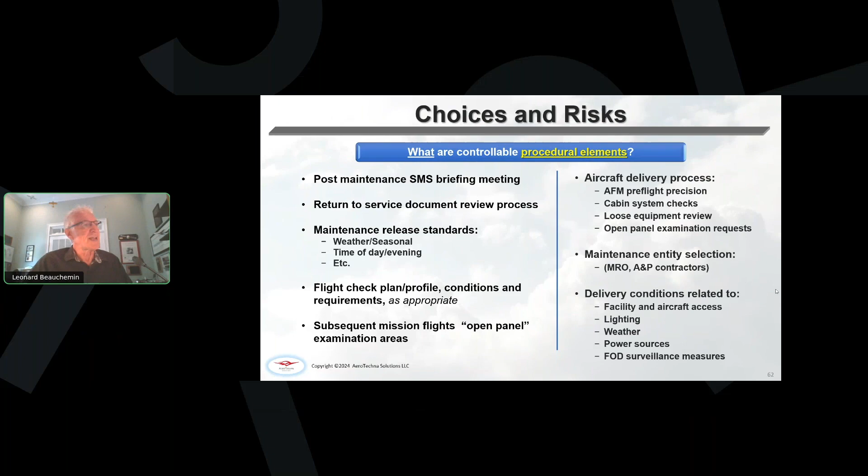Yeah, everything gets moved many times. So if you want an open panel examination, if you do a quick check flight and then have them open, that's also your prerogative. You get to select your MRO. I'll show you a slide on that, and delivery conditions related to the facility, lighting, weather, power sources, FOD surveillance measures. These are all choices we get to make to eliminate the probability of a quality escape.

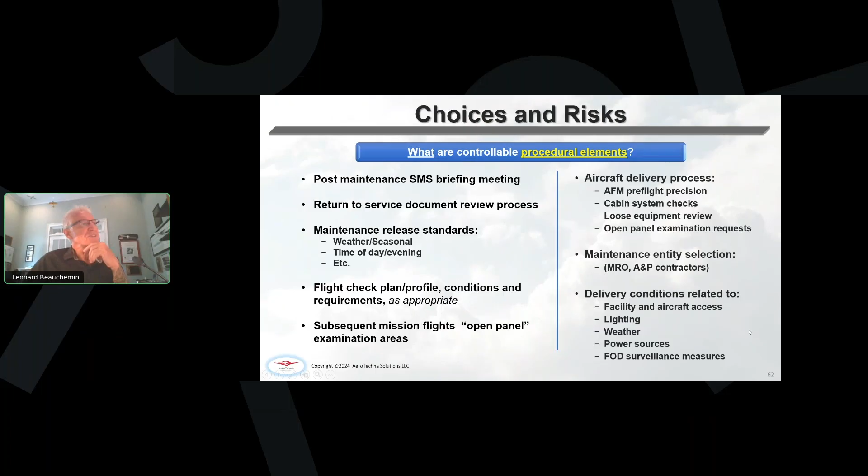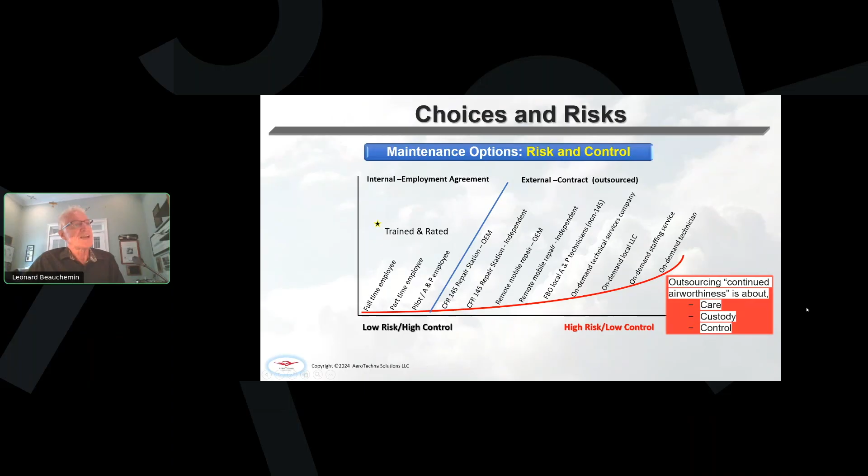I've done that, had to do that, but we built a process around it so I can mitigate the risk of that individual making a mistake. So at that time, you've outsourced care, custody, and control.

So I'm going to show you these, but I'm going to walk you through in a few minutes the debrief that I have that I'm going to suggest. The question to always ask yourselves in an MRO to try to catch a quality escape is: what is or could be different about the aircraft after a maintenance event? That's a big question, and it all depends on the scope of maintenance.

Something else I want to mention is you can create your own critical task or RII items. It's usually only required in a commercial environment, 121, 135 commercial revenue service. But I had such a list in the operations, even though we weren't required to do that. So my landing gear, I might require dual inspection. The MRO may not have any type of dual inspection, but for me, that's significant. So there are certain areas that you might decide when you do maintenance, you tell them that you want dual inspection, right?

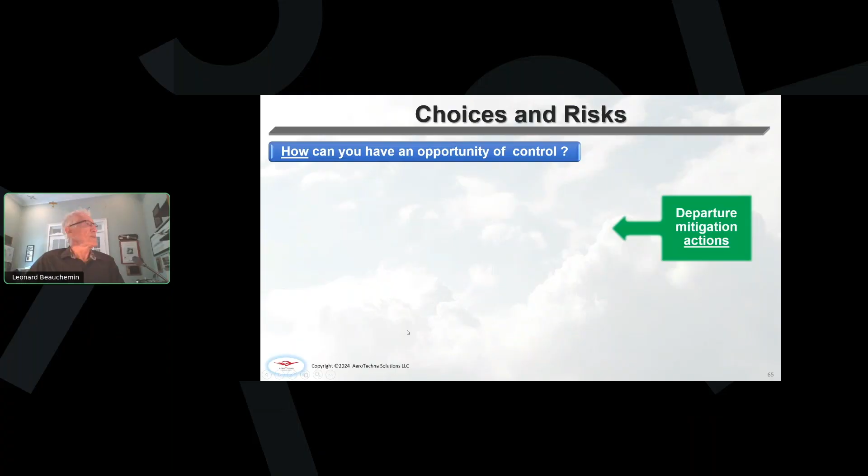Same thing, I'm going to show you this in a minute. AFM compliance, detailed pre-flight, I got that. Crew boot up, you should be looking at your CAS system. The fault history should have been cleared, or look at it, then have it cleared, stuff, departure brief.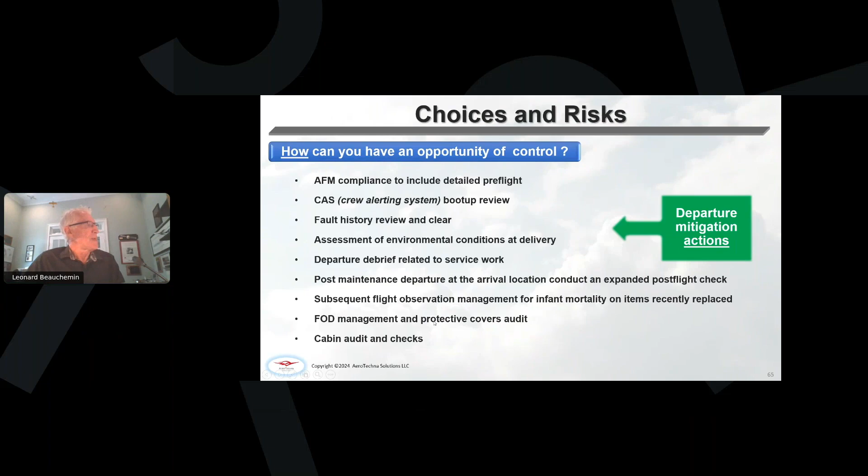All right, I want to get to this list. It's right here.

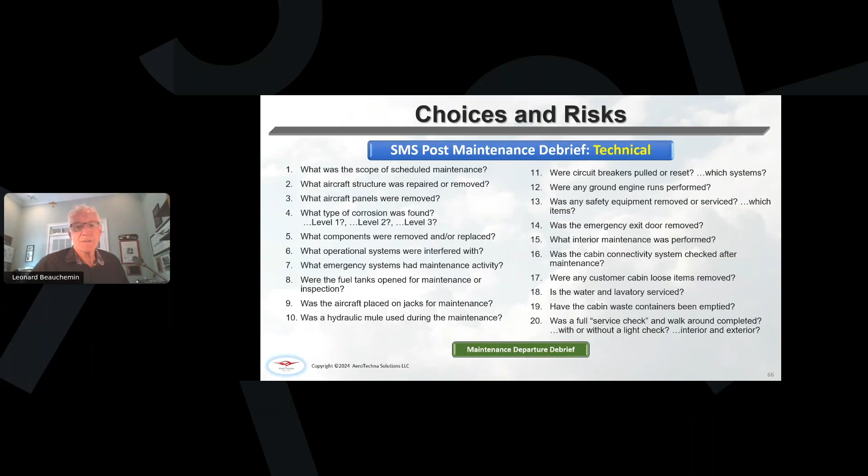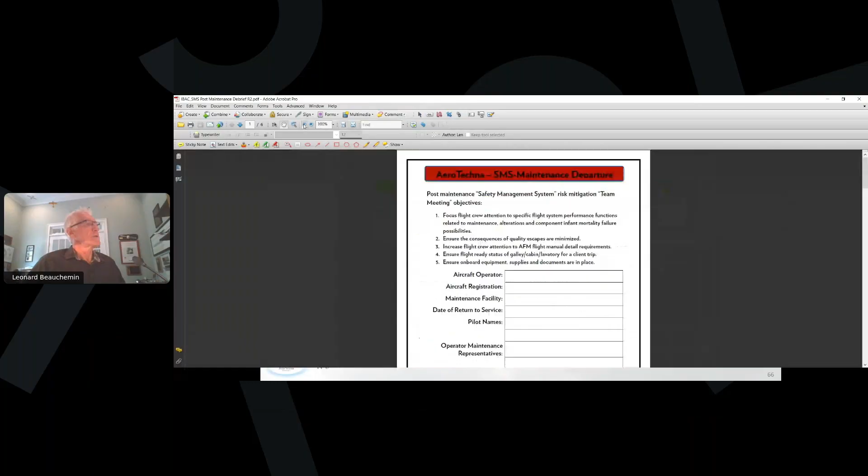So for many years, I've chosen to use a maintenance debrief format with my flight crews to let them know exactly what took place with the aircraft when they're departing with maintenance. Many times I could not be with the aircraft. There's no technician representative with the aircraft. Sometimes yes, sometimes no.

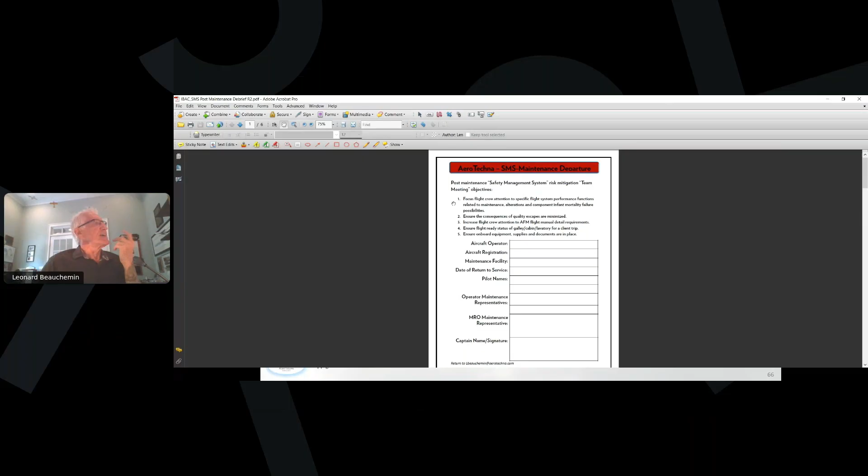But this is a flight crew tool and a flight crew opportunity. And I'll share this, and you can have this both in this format and Word. So the objective is to focus the flight crew attention. I'm going to do this thing real quick. There you go. Let's focus the flight crew attention to specific flight systems and performance and functions.

Ensure the consequence of quality escapes are minimized. That's one of the objectives. Increase flight crew attention to the AFM flight manual detail requirements. Ensure flight ready status of the galley, cabin, lavatory for the client trip. And ensure onboard equipment, supplies, and documents are in place.

Actually, my flight crew will fill all of this out. They'll put their names, the operator, the MRO representative's name will be here. The operator, if there's a maintenance representative's name, will be here.

And when it's completed, the captain name and signature. So you walk through the list. They conduct the SMS debrief. You can do this in person. I like to do it in person. You can do it over the phone. You can do it in a meeting similar to this, whether it's a team or GoToMeeting.

You ensure your review return to service documents. You've determined weather and maintenance flight release standards. You establish a flight check plan profile for conditions, requirements as appropriate for the scope of maintenance. You decide just how deep.

Determine subsequent open panel. Aircraft delivery, check the box here. AFM pre-flight task detail complied with. Cabin system checks complied with. Loose equipment review complied with. Open panel check, access location, right? Establish your delivery conditions, lighting, facility, weather.

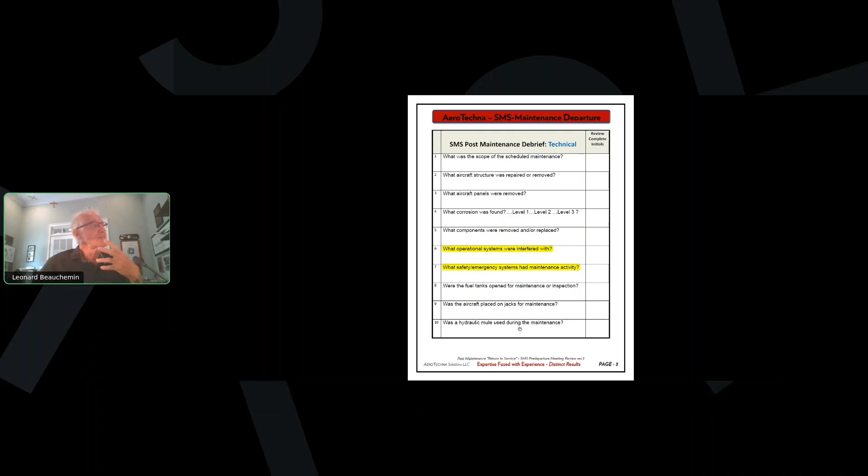What operational systems were interfered with? What safety emergency systems had maintenance activity? Fuel tanks open? Was the aircraft placed on jacks? Was a hydraulic mule used? You want to know that, especially from a flight standpoint, contamination of hydraulic fluid, air in the fluid. These things show up, and not during all the ground checks.

More technical, what circuit breakers were pulled, if any, any ground engine runs, were those performed? You probably want to know that. I like to know exactly who was in my aircraft and who did what on the flight deck. Did they move the pressurization system from auto to manual? I don't know. I've had that bad experience.

Highlighted these, right? Was the cabin connectivity system checked after maintenance? Okay. Were any customer cabin loose items removed?

I had a situation, this is a good story to say. So the aircraft was released from maintenance. Everything went very well in the flight. We got back to our operating base, which was remote from where I am and where my high net worth principal was, to find out that his laptop was missing. You may have sawed the wings off of the airplane, he was so upset. He left it in the aircraft. I did recommend my crew remove all loose equipment and items from the cabin. Had to locate what was a high priority sensitive laptop, to determine that it was a quality assurance individual that found it in a cabinet and felt it needed to be secured, and put that laptop in the office in his cabinet personally with no record of that.

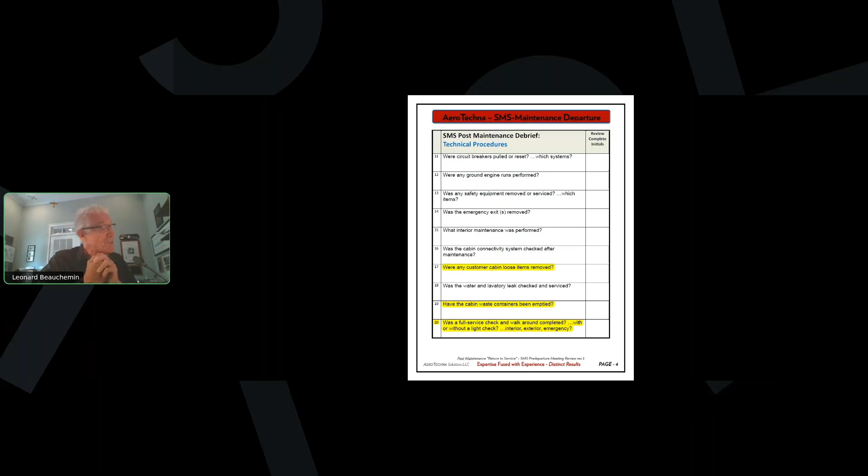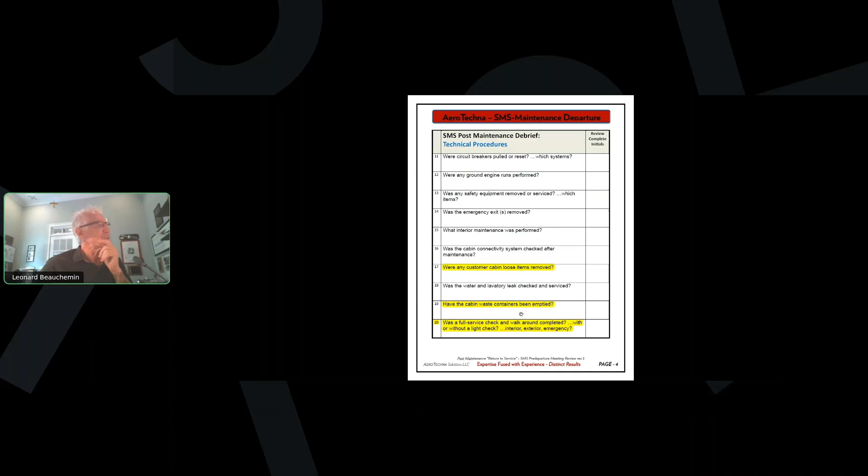So it's a good question. Was any cabin or loose items removed, right? Has the water been leak checked? Have the cabin waste containers been emptied? Had that situation, probably many in the call had that. Well, the airplane doesn't smell too good. Was a full service check and walk around completed, with or without a light check? Interior, exterior, emergency. Good stuff to know, right?

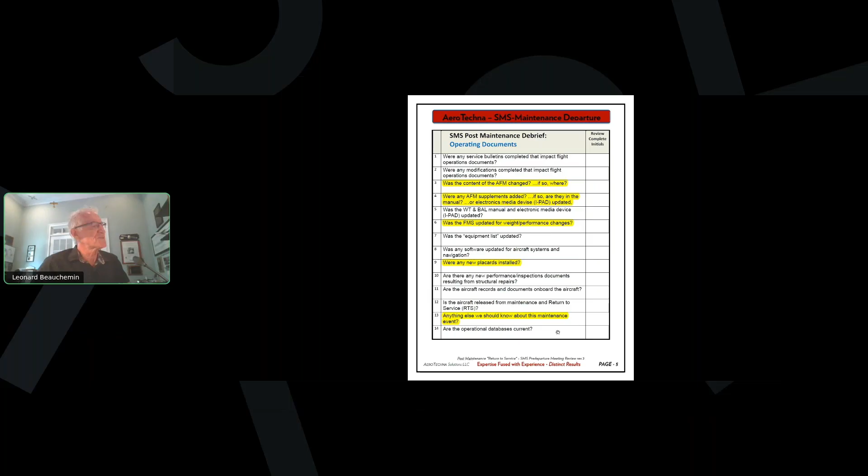Wouldn't understand sometimes—I've had this where we get home and find out the enhanced ground proximity warning database was out of date. Why? Because they didn't ask.

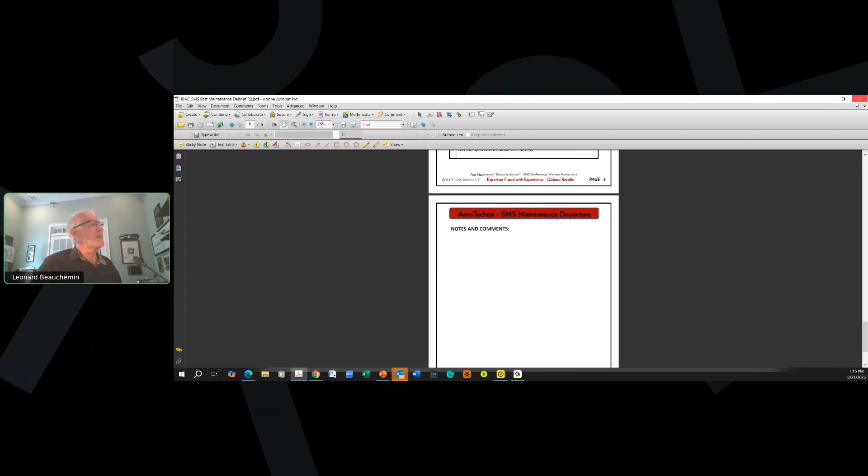And then a place for comments. So that form can be provided if you like. That's what this is all about—those questions put into a format.

So when we get to the return to service of the aircraft, we've got our choices and risk. This is our job—we have one job, right? Bring the aircraft home in perfect condition for continued operation.

Recognize high-risk environments and activities. I do this constantly—you look at the MRO, look at the FBO, understand the risks being presented to you. A lot of activity today, and it's not business as usual, especially in the MRO business.

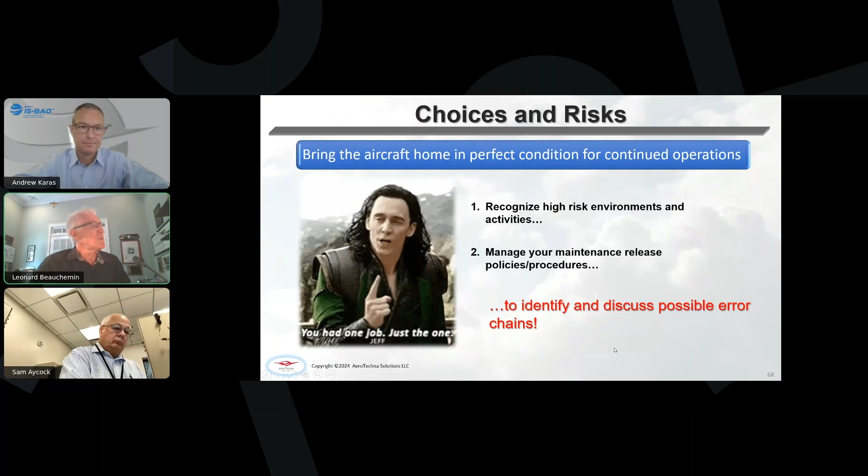Manage maintenance release procedures—I try to make that. These are two very criticals. And then you should have a roundtable. I'm a big supporter of identifying and discussing possible error chains.

So in kind of a closing point here, there are many entry points for quality escapes. Failures by type design are not unexpected—there's nothing we can do with those, you're not going to catch that.

Failures by maintenance are unexpected with unpredicted outcomes. We need to fix that. I look for them all the time.

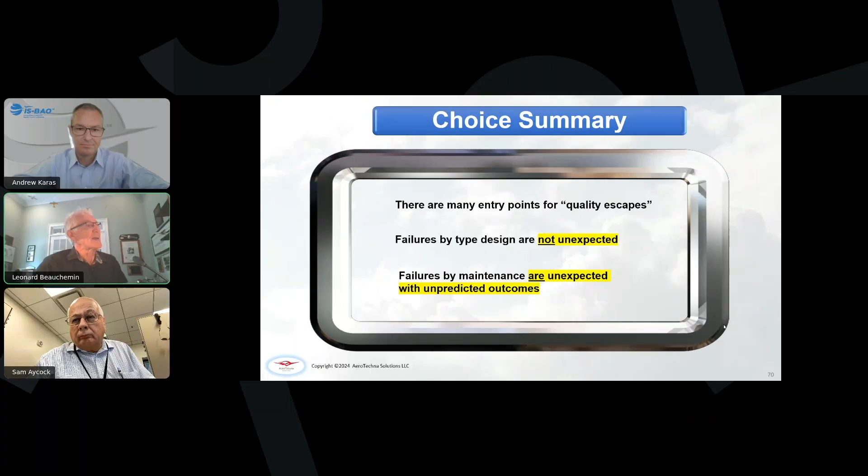Some takeaways, I hope, from this time I've been able to talk you through this—hopefully not too much of a soapbox—is that I'm such a proponent of completing a post-maintenance safety management debrief. That's asking those questions.

And then precisely follow the AFM pre-flight requirements. That's the time to use mitigation tools in failure management, whatever you have in your system.

We're trying not to be autonomous—talk to everybody when conducting aircraft maintenance: schedulers, dispatchers, cabin safety attendants, flight attendants, whatever your term is. Use a critical thinking approach for each event.

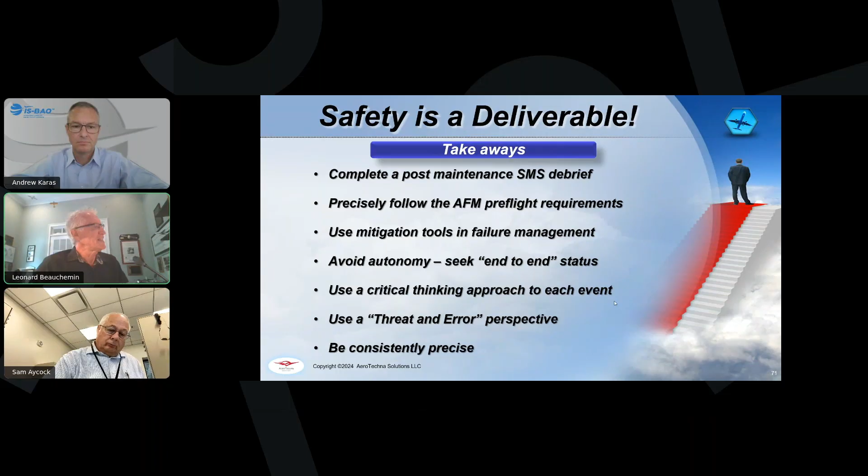Unfortunately, I find today's educational system doesn't really focus on critical thinking too well. Use threat and error management, and be consistently precise.

So I don't believe that any quality escapes are acceptable. I put that up as a question for you. I don't know that you'd return to service any aircraft that has one—I try to avoid that.

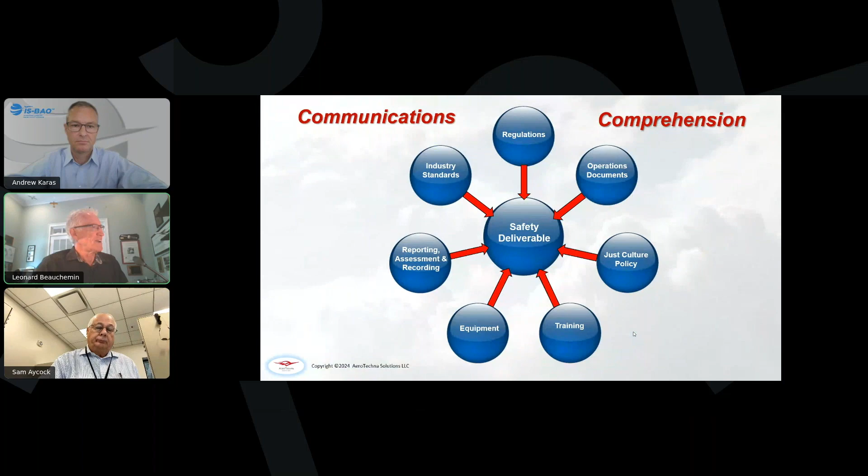This is a summary really of what I've said, the elements we use to establish safety as a deliverable. You've seen that—it's the same thing, kind of a wrap up there. I think we've covered all of that.

And I promised one more thing here. So if you get to crash land on the island of quality escapes and you survive, you have 5 minutes to send a message to your colleagues who will do your job until your return.

I've done this exercise quite a few times with my team, and they're going to tell you what's important. So you have 5 minutes to send this message to a colleague who will do your job until you return: please ensure that you do this task action to keep your operation running smoothly. You'd be surprised when you ask your people to answer that question in this little exercise.

You want them to tell you what they believe is most important to keep your operation operating smoothly and precisely, and it might not be what you would expect them to say. So it's a fun little exercise.

Also in October, I'll be delivering an aircraft maintenance program and education class—it's all about your scheduled maintenance. I'm not here to sell you on the class, so please don't take it that way, but we're always looking for career development, and recently I've been asked about that.